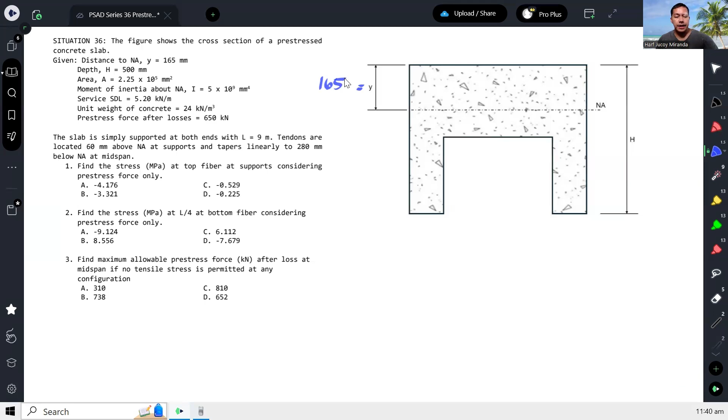In this particular problem, we have a problem from pre-stressed concrete. The figure shows the cross-section of a pre-stressed concrete slab. The distance to neutral axis, y, is equal to 165 millimeters. The depth or overall depth is 500 millimeters. The area is given, moment of inertia is given, service, superimposed dead load given, and then we are also given the unit weight of concrete.

So once again, yung SDL, ibig sabihin superimposed dead load. Kapag sinabing superimpose, it means that ito yung ipinatong lang doon sa structural element natin. So ibig sabihin, hindi pa kasali sa dead load na to yung self-weight ng mismong structural element. Later on, we will add that because binigay naman yung unit weight ng concrete.

Okay, and we are given the pre-stressing force after losses of 650 kilonewtons. The slab is simply supported at both ends with length equal to 9 meters. Tendons are located 60 millimeters above the neutral axis at supports and tapers linearly to 280 millimeters below the neutral axis at the midspan. So this is a type of pre-stress concrete problem wherein the eccentricity of our tendons is not constant.

So i-drawing natin. Yung cross section niya, I mean yung elevation view niya. So let's say ito yung slab on the elevation view. Kasi sinabi naman simply supported. So parang sinasabi niya that if this is the neutral axis.

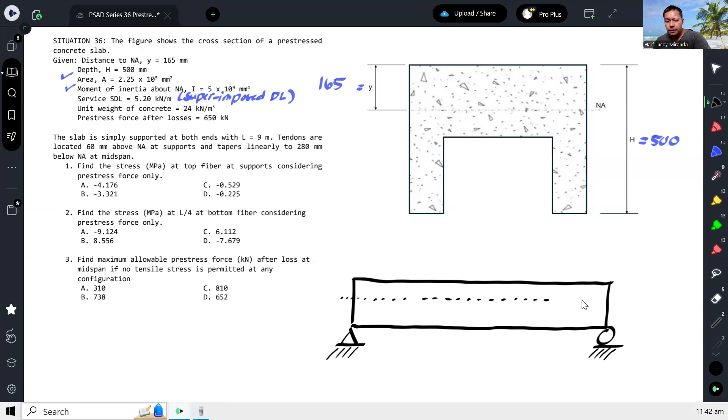Sabi niya, dun sa support, it is the tendon is located 60 millimeters above the neutral axis. So nandito. And dun sa midspan, it is now below by 280 millimeters. So let's say nandito naman. So kunwari yan yung midspan. So ibig sabihin yung tendons natin, ganito ang itsura.

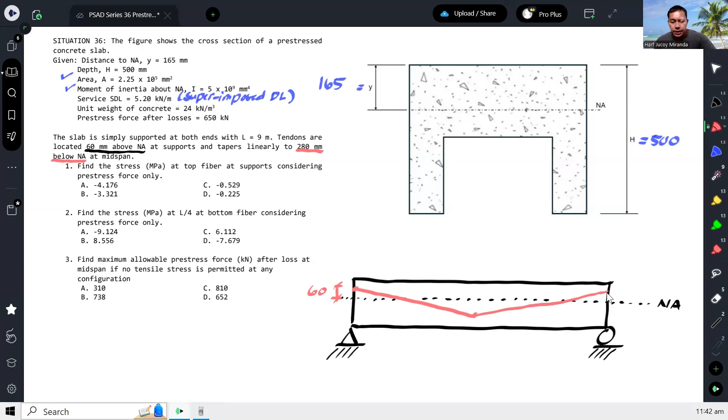So this is at 280 millimeters. So this is at the midspan. So in short, yung mga sukat, lagyan natin. This would be the full span, 9 meters. So yung kalahati is 4.5.

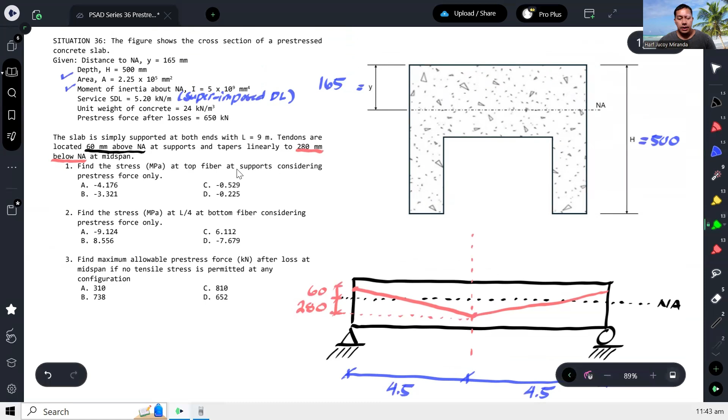Alright? Okay, so now, what are the questions? Find the stress at the top fiber at the support considering pre-stress force only. So ano daw yung stress sa top fiber at the support? Top fiber tapos sa support.

Okay, ibig sabihin, dito tayo mag-a-analyze. Pwede dito, kahit saan dyan. Okay, let's say kunin natin yung section na to. So yun yung section at the support.

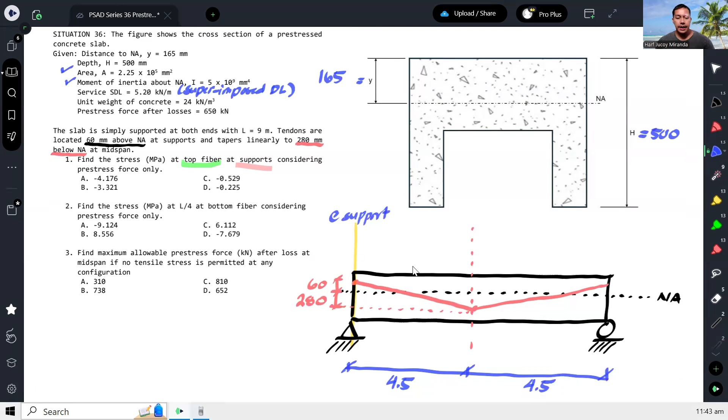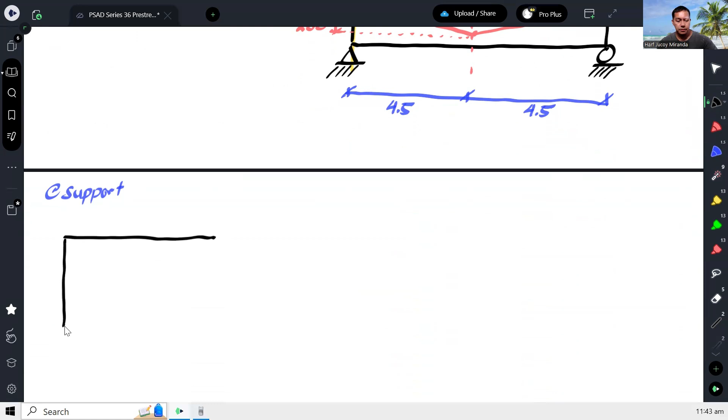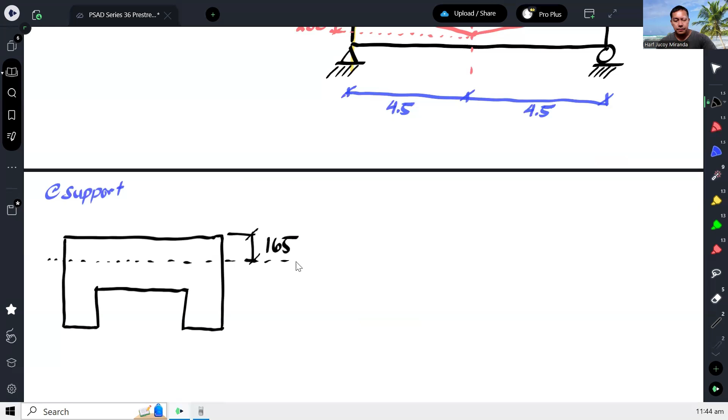Alright, so drawing natin. So the cross section will look like this at the support. Tapos kunwari ito yung neutral axis. So from the top, sinabi naman na this is 165. And then overall depth is 500. So ibig sabihin 500 minus 165, that's 335. So 335 naman yung distance sa bottom.

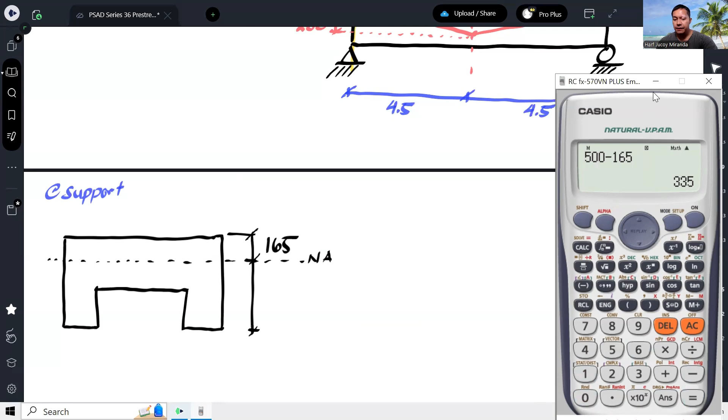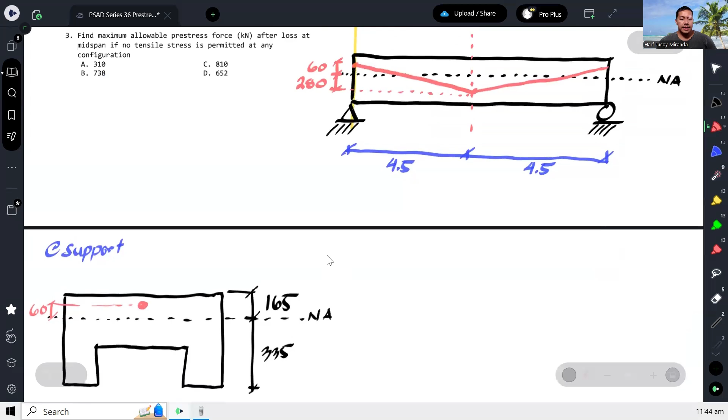Okay, tapos at the support, yung tendon nandito. Nasa 60 mm above the neutral axis. So nandito yung tendon, 60 mm. Okay, so ang tinatanong lang sa atin sa number 1 is ano yung stress dun sa top.

So dito, ano yung stress dyan? Due to pre-stress force only. So wag muna natin isasali yung load na binigay. Kasi sinabi niya naman na pre-stress force only. So let's see, alam natin na kapag tumingin tayo sa side, ganito yung mangyayari. Kunwari yung near support na cross-section.

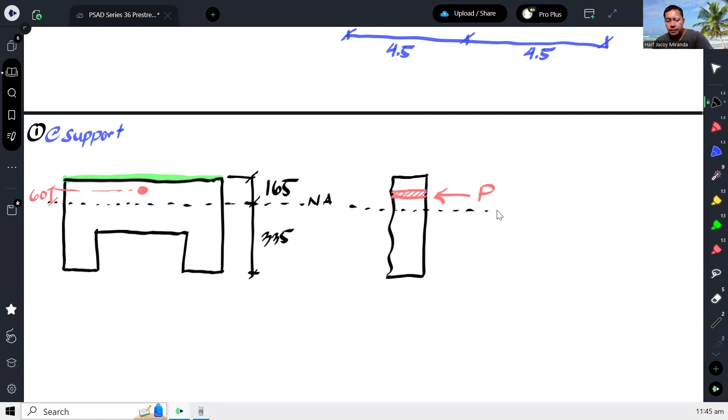So nandito yung tendon. Dyan sa tendon, magkakaroon ka ng pre-stressing force. Tawag dyan pre-stressing force, P. Okay, tapos ito yung neutral axis natin. Alright, so ngayon, dahil dyan sa pre-stressing force na yan, it will produce a compressive force or compressive stress at the top fiber.

At the same time, that particular force will create a bending moment in this direction. Kasi yung eccentricity mo nasa itaas eh. So pagka in-apply mo yan doon sa taas, ang ikot niya would be counterclockwise in this particular section of consideration. So ibig sabihin, yung moment na yan will be equal to P times yung eccentricity natin, in this case na 60.

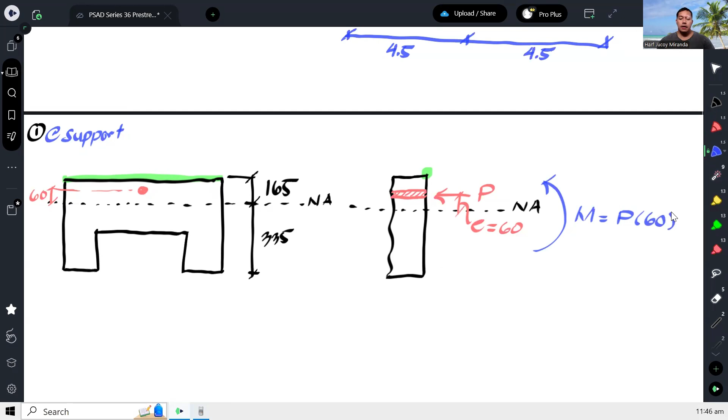So that means that the stress at the top, so top at the support, would be equal to - again, assume negative yung compression, positive yung tension. So yung pre-stressing force that will have a negative effect, P divided by yung area ng cross-section, and itong moment na to at the top, it will also have a negative effect. Negative MC over I.

Okay, and to expound on this, yung P natin is already known to be 650. Gawin lang natin na Newton para maging megapascal yung sagot. Tapos yung area naman ay binigay na 2.25 times 10 to the 5.

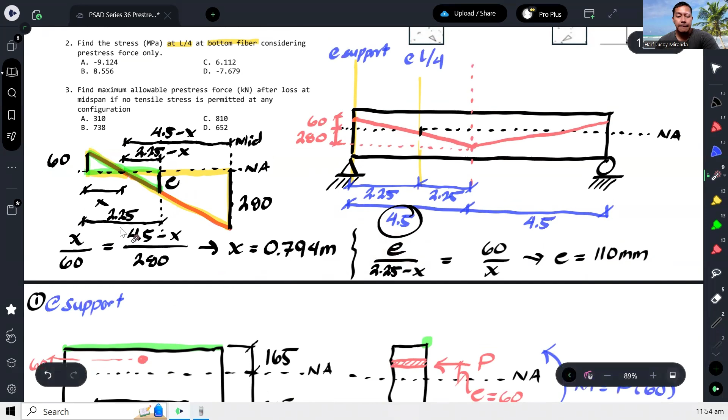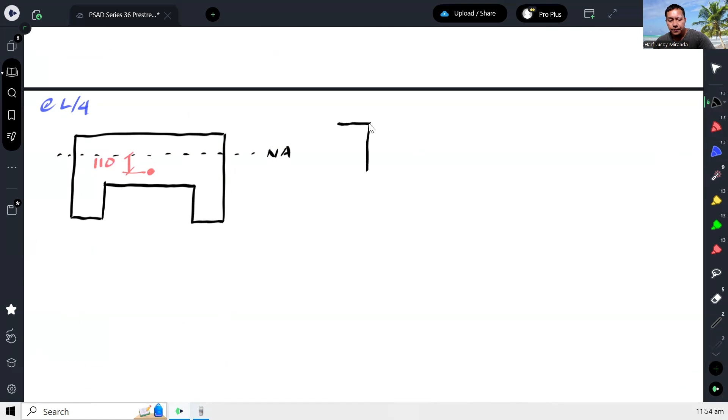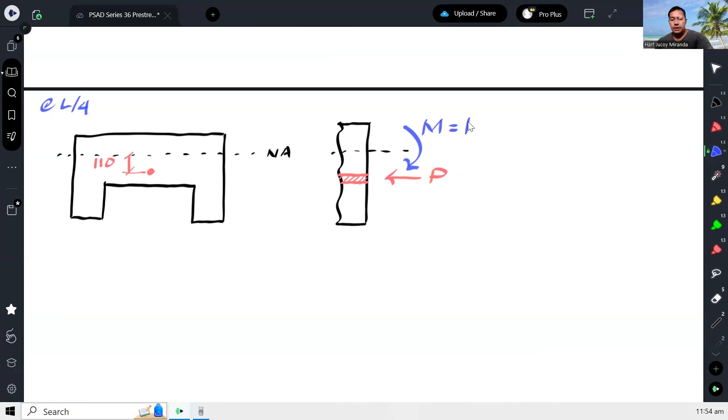Nandiyan na yan, no? So ang sukat nito is 110. So once again, kapag dinrawing natin yung cross-section sa side view, ayan, okay, so ito nandito na. Ito yung neutral axis natin. So ito ay nandito na, yung tendon. So again, yung tendon na will have a compressive force P. And according to our diagram, it seems that this P will produce a bending moment in the clockwise direction, so P times yung 110.

Okay, ayan, no? So ngayon, tinatanong tayo sa number 2, ano daw yung stress sa bottom fiber? So sa bottom fiber, meaning dito naman tayo mag-focus, dito, bali dito. Okay? So ano naman yung stress dyan?

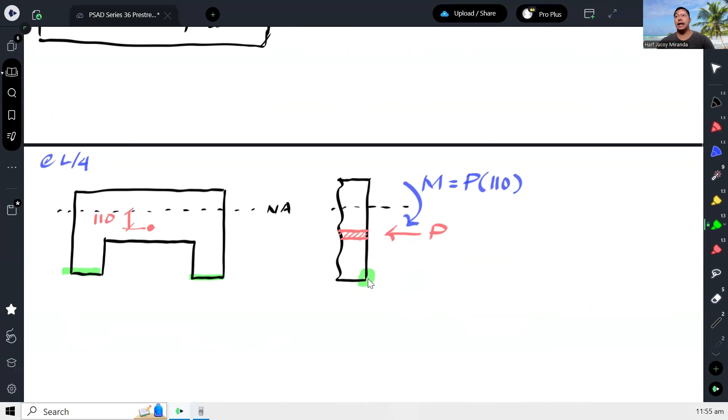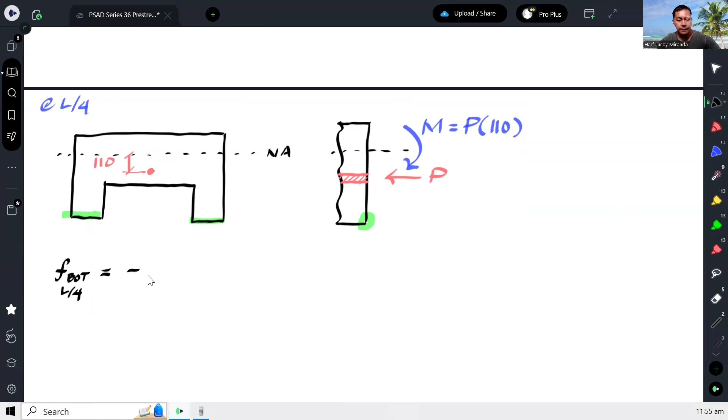Okay, so to calculate, once again, due to pre-stress force only ha, hindi kasali yung loads. So therefore, we have F at the bottom at L over 4 is equal to, compression is negative, negative 650,000 over yung area na 2.25 times 10 to the fifth.

And then, as you can see, yung effect nitong moment dito sa ilalim is also compressive, no? So that will be 650,000 times eccentricity na 110 times. So take note na yung C natin dito is yung layo niyang fiber natin mula sa neutral axis. At di ba kanina, ito yung 335, kasi ito yung 165. Okay, so this should be 335 over moment of inertia, which is 5 times 10 to the 9.

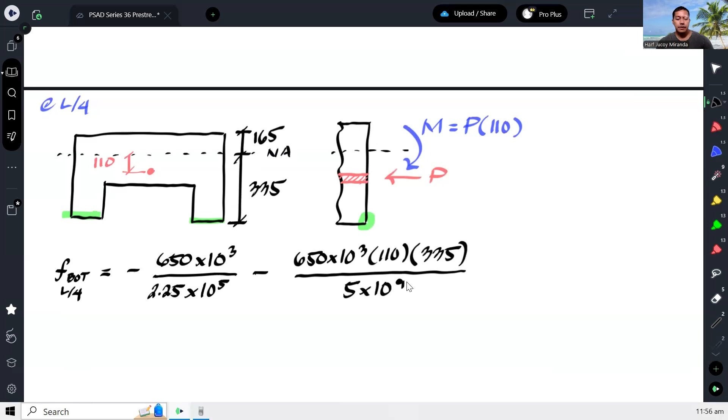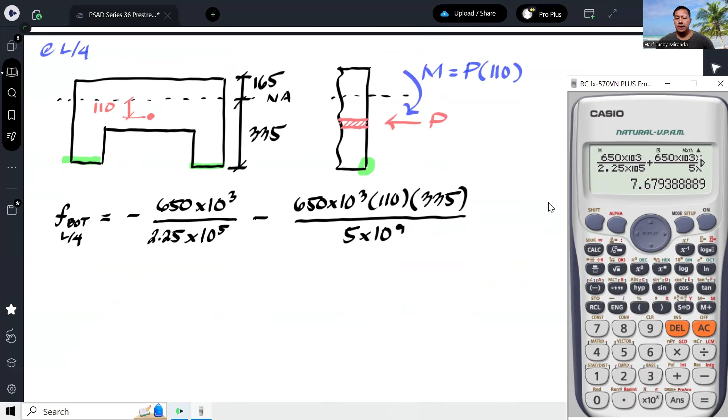Ayan, 5 times 10 to the 9. So therefore, we have, hindi ko lalagay negative, total negative naman lahat yan. So ito, samahin na lang natin, 650. So that gives us 7.67 na negative, no? Okay, once again, the negative sign indicates that this is under compression.

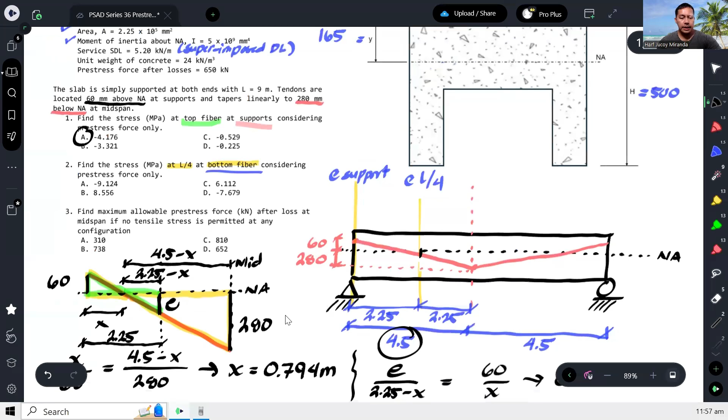Okay, so for number 2, our answer would be letter D. Okay, and then lastly, find the maximum allowable pre-stress force after loss at the midspan if no tensile stress is permitted at any configuration. So doon naman tayo sa midspan mag-a-analyze dito.

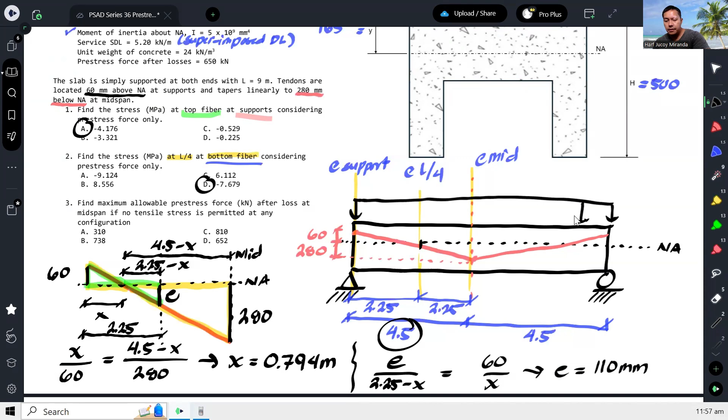And in this case, isasama na natin yung load, no? Isasama na natin in-apply na load. So may load tayo dito. Okay, so yung load na yan is dapat unfactored no kapag nag-a-analyze tayo ng pre-stress no.

So we will have yung 5.2 plus yung self-weight. So ang self-weight ay calculated as gamma, yung unit weight na to, multiplied by the area of the cross-section para maging kilonewton per meter. So tingnan nyo na lang no, yung kilonewton per meter cube. Para maging kilonewton per meter, kailangan mo mag-multiply ng meter squared, which is area, itong area na to.

Okay, so that would give me 24 times 2.25 times 10 to the fifth. Pero naka-millimeter squared kasi yan eh, gusto natin meter squared, so magdi-divide tayo ng 1,000 squared. Okay, and kapag kinompute natin yan, that will give us 5.2 plus 24 times 2.25 times 10 to the fifth over 1,000 squared. So that gives us 10.6.

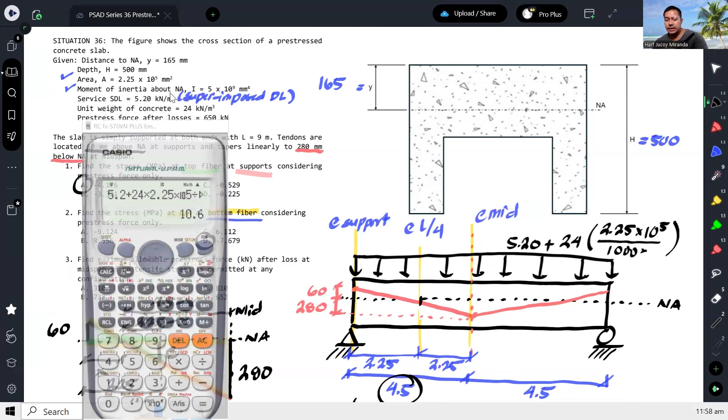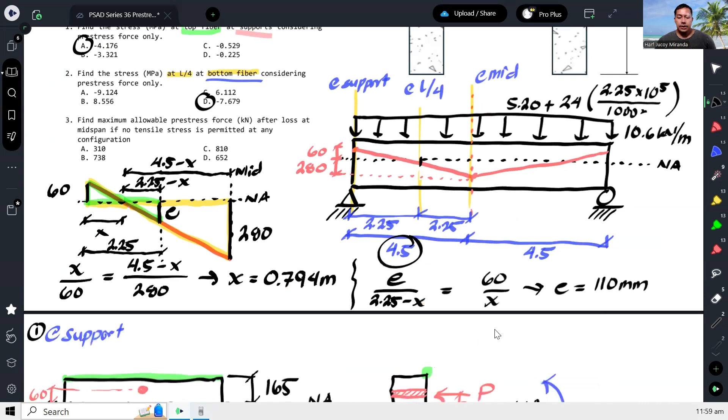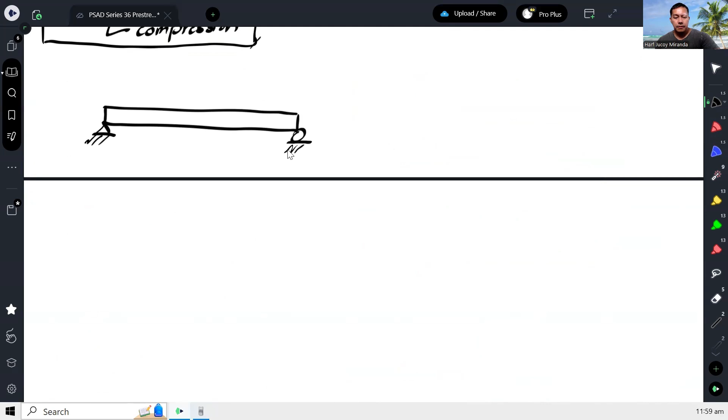Okay, so meron tayo ngayong load na total load na 10.6 kilonewton per meter acting on the slab. Alright, so now dahil sa midspan na tayo mag-a-analyze, bali ito ngayon yung beam natin or yung slab. Okay, so di ba kung meron kang load, alam natin na kapag kinat natin yan dito, okay, meron niyang mapoproduce na bending moment dahil sa load na to.

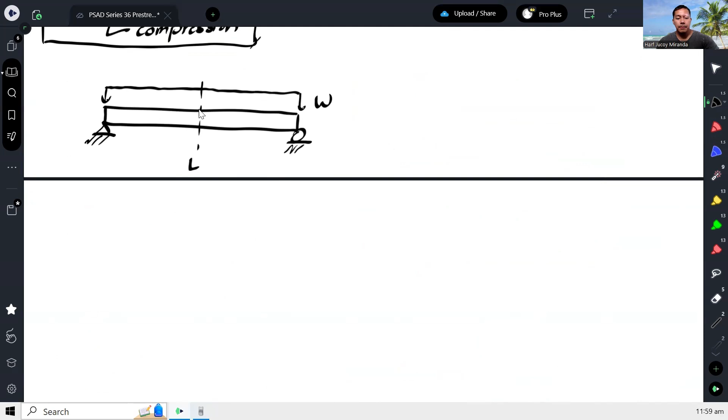W. Kung meron itong span na L, yung moment dito na mapoproduce will be... ang bending kasi niyan ganito eh, so positive in nature yung bending niya. Okay, so ibig sabihin yung moment mo pag ganito. Okay? Alam din natin na yung moment na yon due to the loads, tawag ko na ML, is equal to W L squared over 8 kapag simply supported with a uniformly distributed load throughout the span.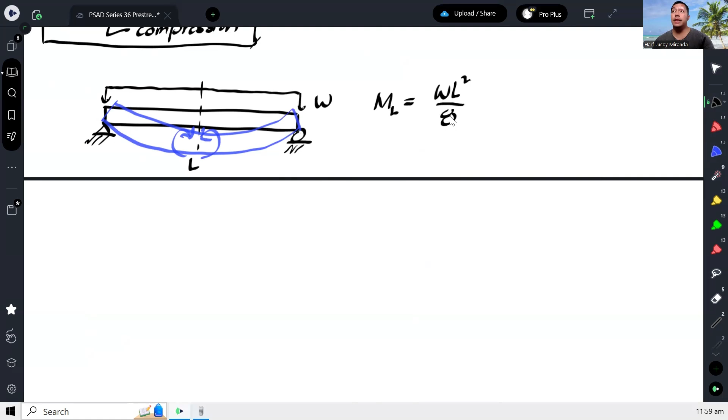So therefore, we can directly calculate here 10.6 times span squared over 8. And yung maximum moment na yon at the mid-span due to the load would be 107.325 kilonewton meter. So ito ngayon yung moment. Pero itong moment na to positive in nature, no? Ibig sabihin ang ipoproduce niya na bending is positive bending.

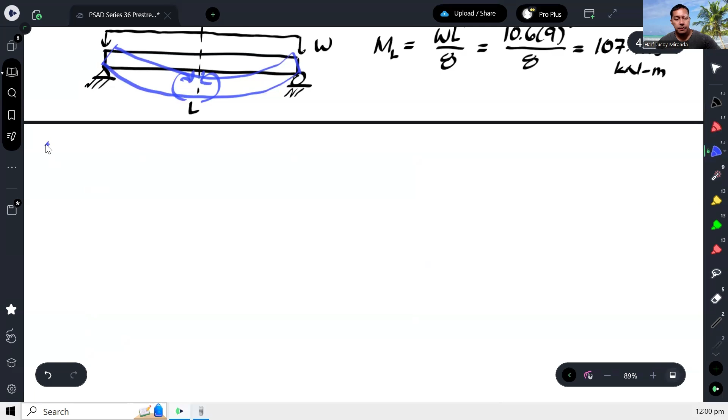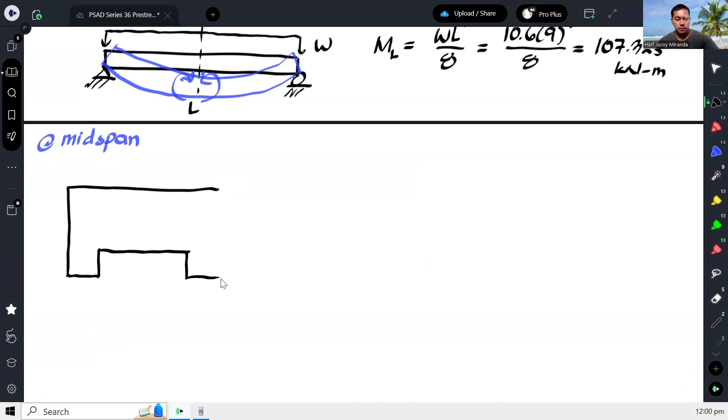So ganitong itsura. Ngayon kung titingin tayo sa support, I mean at the midspan. Okay, kung titingnan natin yung cross section sa midspan, ganito ang itsura. Ganyan, no? So ito yung neutral axis. Ito ay 165. Ito ay 335. Tapos yung tendons natin is located 280 at the bottom.

Okay? So ngayon, kung titignan ulit natin yung cross-section view niyan or yung side view niyan, ito yung neutral axis. So yung tendons natin nandito. So yung tendons na yan, meron ulit compressive force P. So based on the configuration, ang moment na ipoproduce niyan is ito. Okay? So yung moment na ipoproduce niya is negative in nature.

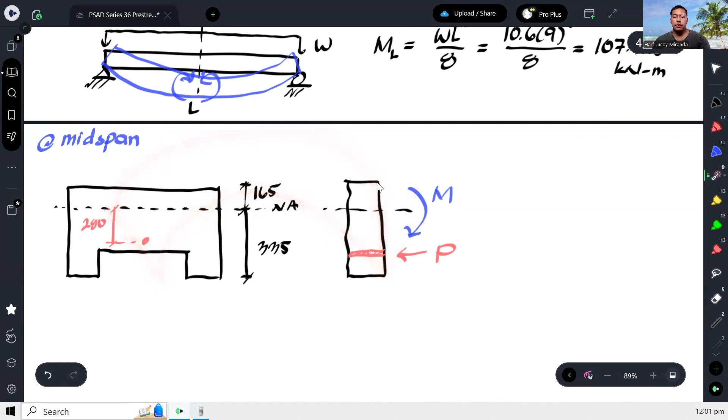No? Bakit negative? Kasi ang nangyayari, tinutulak nito yung baba niya. So ibig sabihin, pag tinulak mo yung baba niyan, yung beam natin is gaganto, gaganyan. Okay? Kaya di ba yung ganitong klaseng bending, negative in nature. Alright? So kaya ganito. So ngayon, ibig sabihin, yung moment naman na to, na positive in nature, kapag tinranslate mo dito, ang itsura niya is pa ganito. Okay? Kasi ang ginagawa naman nung moment na yun, na galing sa load, is binibend niya yung slab in this direction.

Okay, so yan yung nangyayari. So yan lahat ng mga loads natin on that particular mid-span support, at the mid-span. So ang tinatanong sa atin is, ano daw yung maximum pre-stress force P?

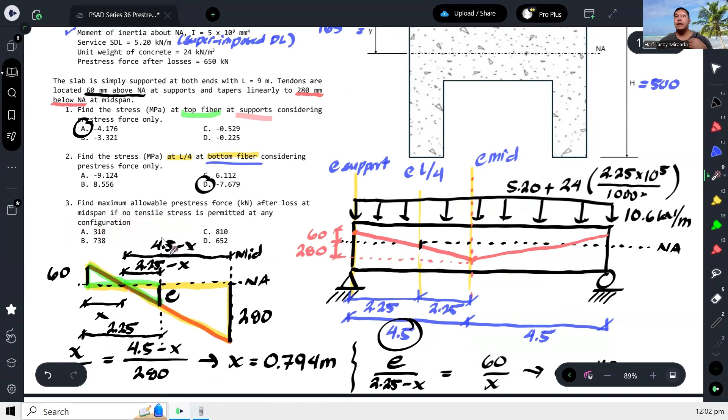Pinapa-recalculate itong P para walang tensile force at any configuration. Hindi niya sinabing at the bottom, ha? Sinabi niya at any configuration. So kahit saan, okay? Kung pag-iisipan mo, dapat walang maging tension mula top hanggang bottom. Ganun yung gusto niya mangyari.

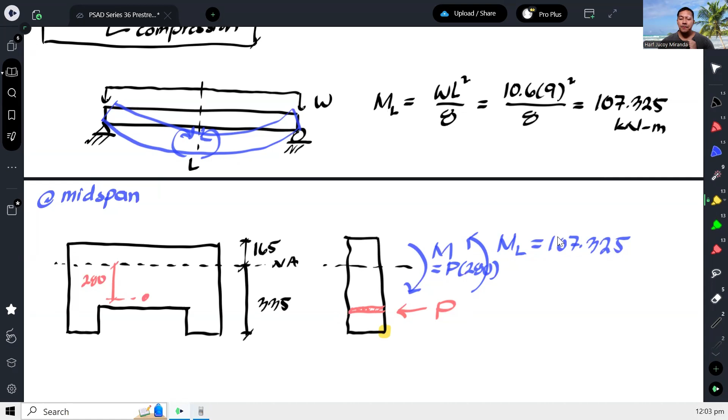Okay, ito, fix na to na 107.325. Tapos itong M na to will be equal to P times eccentricity na 280. Kasi itong P na to, kumbaga, i-resolve natin. So ngayon, kung mag-focus tayo sa bottom, madalas kasi sa bottom nagfo-focus no? Computin natin yung stress sa bottom.

So ang stress sa bottom at the midspan, okay, ay equal sa yung pre-stressing force, compression yon. Yung moment due to the pre-stressing force will also have a compressive effect at the bottom. Lagay ko na P times 280.

Tapos yung C natin sa bottom ay ito, 335 over I. Lagay ko na muna I. Okay, and then ito namang moment due to the loads, no? Moment due to the loads. Ang C niyan is also 335 kasi ang tinutukoy natin is bottom over moment of inertia. Ang effect niya naman sa bottom ay tension.

So dapat daw kumbaga, solve natin itong P na to in such a way na sisiguraduhin natin na walang tensile stress dun sa, in this case, dun sa bottom.

So dapat ito ay actually ano ang ginagawa ng iba, dapat in-equate sa zero, pero medyo misleading kasi yung ganyan. So ganito na lang, 'di ba ang gusto lang naman natin siguraduhin itong buong computation na to ay hindi mag-positive. Huwag magpa-positive kasi ang positive ibig sabihin tension. So para hindi yan mag-positive, dapat itong buong to ay mas mababa or equal sa zero. Okay, so yun yung tama na analysis.

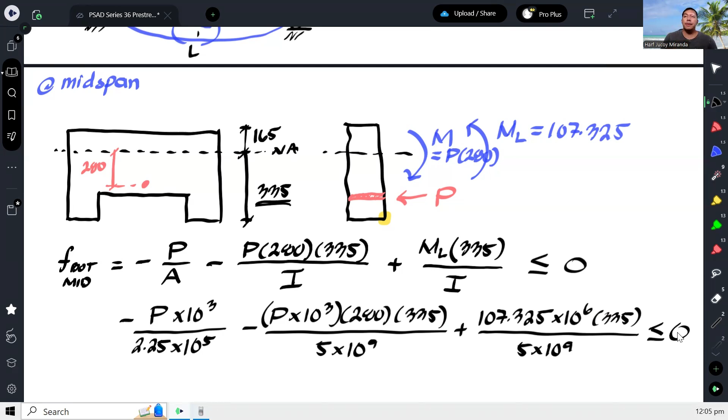And then plus, ito ay may value naman. Pero ito kailangan naka-Newton millimeter, so multiply ko ng 1 million. And this should not exceed 0 to maintain it being compressive.

Okay, and now if you solve for P, bali kung mapapansin nyo, you can factor out yung P dito. We can factor out yung P. Tapos you can transpose this on the other side. Okay, so magiging negative ito, no? Parang ganito yan.

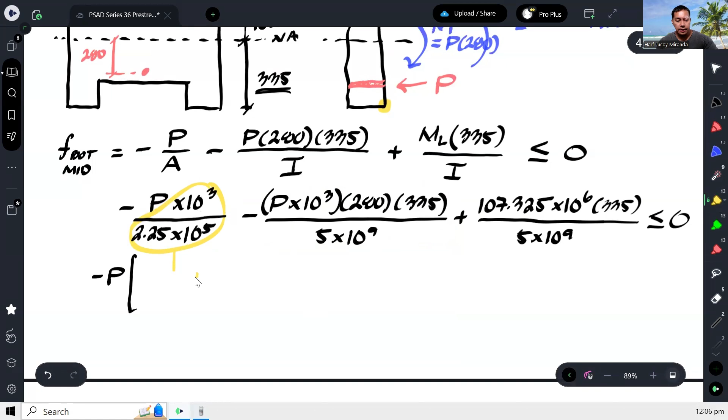So negative P, tapos itong buong to, lagyan ko na lang ng highlight ha. Itong buong to, yung mga yan, ha? Yan yung may iwan dito sa loob. Okay, or ganito na lang. Ito, dito yan, tapos minus, ito naman. Dito yan, ha?

Okay, so finactor out ko yung, sorry, plus na pala to kasi finactor out ko yung negative. Less than or equal, ito naman magiging negative. Negative na itong buong to. Nilipat natin sa kabilang side, tinranspose ko. Okay, tapos para ma-compute natin yung P, hindi ba di-divide natin ito?

Di-divide natin itong buong to dito. Okay, tapos isasama natin yung negative, di-divide natin to. So bali, magiging positive na tong right side. Pero di ba merong rule ang inequality na kapag ka nag-divide or nag-multiply ka ng negative side, kailangan mo itong baliktarin. Okay, so ibig sabihin, yung P natin will be, magbabaliktad na, should be greater than or equal to the value here. And that value is just, kapag sinolve mo to, as an equation.

No? Kapag sinolve mo yun as an equation. So bali, ganito na lang. So negative x 2.25 to the fifth, minus yung P times 1,000 times 280 times 335 over 5 times 10 to the 9, plus 107.325 million

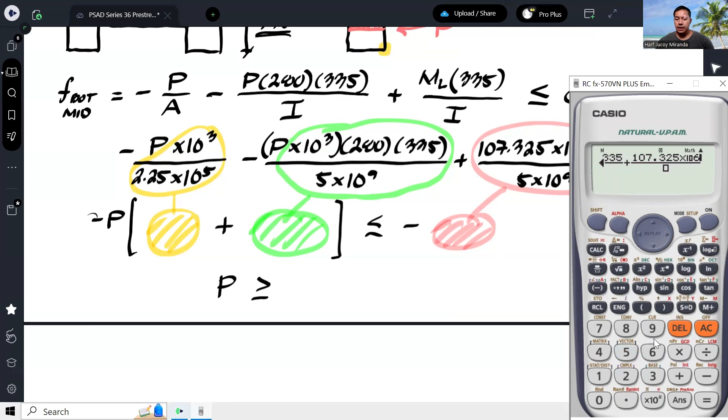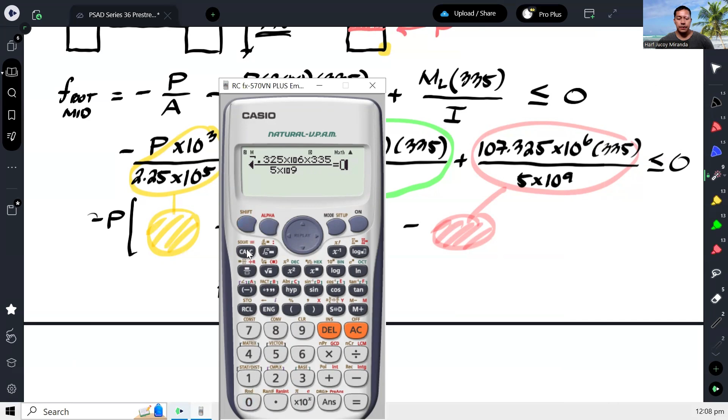times 335 over I. Okay, again, if you solve that as an equation, so if you solve that, ang x natin is 309.887.

Okay, ito ngayon yung disadvantage kapag sinolve mo lang siya as an equation. You wouldn't understand, no? Ano ba itong 309.887? Yan ba yung maximum na pwedeng P o yan yung minimum na kailangan na P para walang tensile force or tensile stress? Well, based on our inequality, it is telling us that our P should be at least 309.887 kilonewton to ensure na walang tensile stress sa bottom.

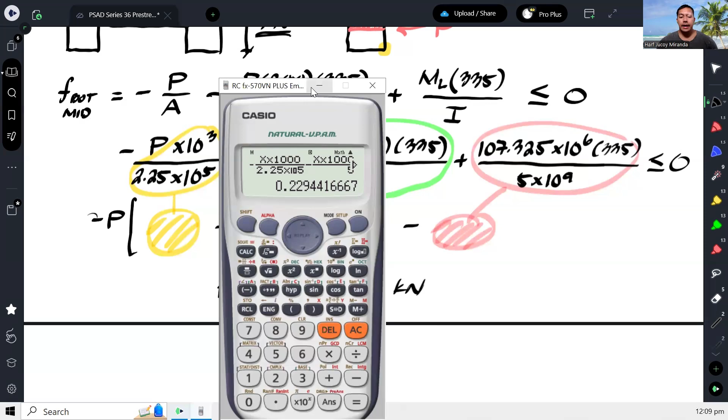Okay, so ibig sabihin, kapag mas mababa dyan, magkakaroon dito ng tensile stress. Kunwari, no, ito, calc natin, calc. Syempre kapag yan, 0, no? Kapag nilakihan natin, 310, negative. So ibig sabihin, compressive. Pero pag niliitan natin, sabihin natin na 300 na lang, nagkakaroon ng positive stress. So ibig sabihin, hindi po pwede bumaba ng 309.887 yung force P kasi magkakaroon na tayo ng tension dun sa bottom.

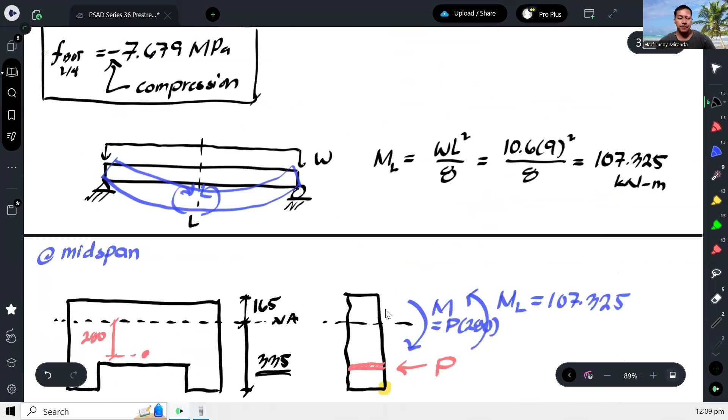Okay, and yan na ba yung sagot? Yan na ba yung sagot? Actually, meron ditong 310, well, not yet. We also have to counter-check kasi itong chinek lang natin sa bottom eh, bottom sa mid-span eh. Eh, paano naman yung sa top? Baka kasi yung sa top, magkaroon din tayo ng issue dyan. O, tingnan natin, so check naman natin yung sa stress sa top, sa mid-span.

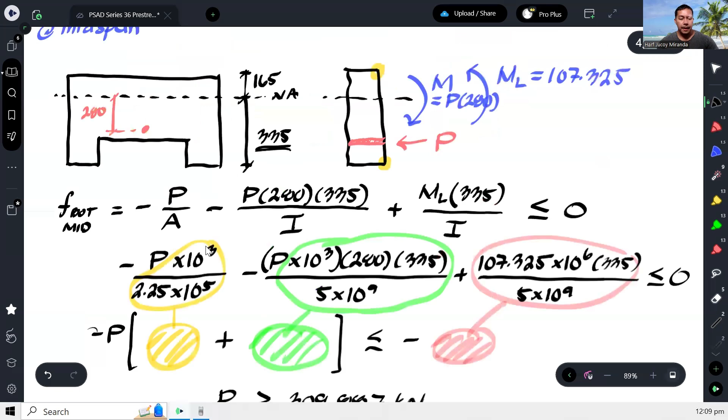So actually, halos ito lang din yung formula. Bali, negative P over A. Okay, tingnan natin isa-isa ha. Itong moment na to, magpo-produce ng tension dito sa top. Okay, so plus na yan.

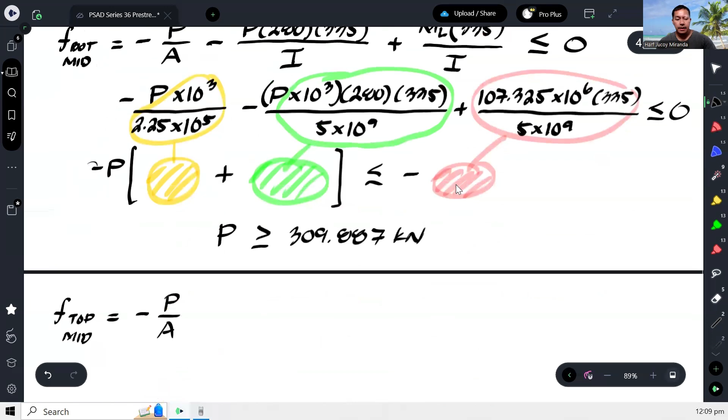Plus P times 280 times, okay take note, yung C natin sa top, ito na. Kasi nasa top na tayo, ito na. 165, no?

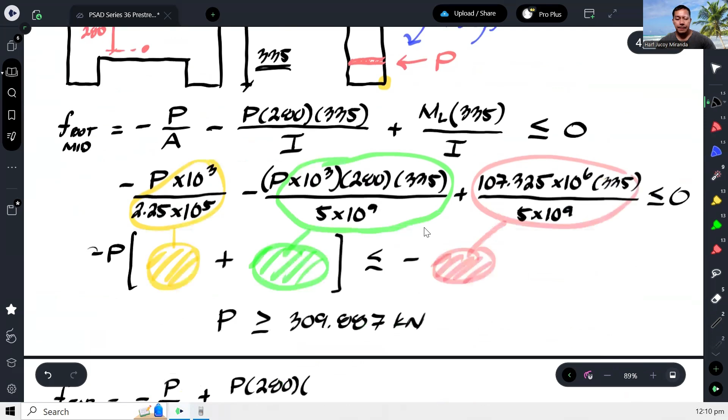165 over I. Okay, tapos yung moment naman due to the loads, kung titingnan natin yung effect nya sa top, compression naman. No? Compression. So negative. Moment due to the load times yung C is once again 165. Yun yung distance papunta sa top mula sa neutral axis.

So magiging ganito siya. At dapat hindi ulit ito lalagpas ng zero, kasi gusto natin ma-maintain na negative yan para compression lang siya. Pag lumagpas yan ng zero, magiging tension na siya and ayaw natin yun. Yun yung gusto ng problem.

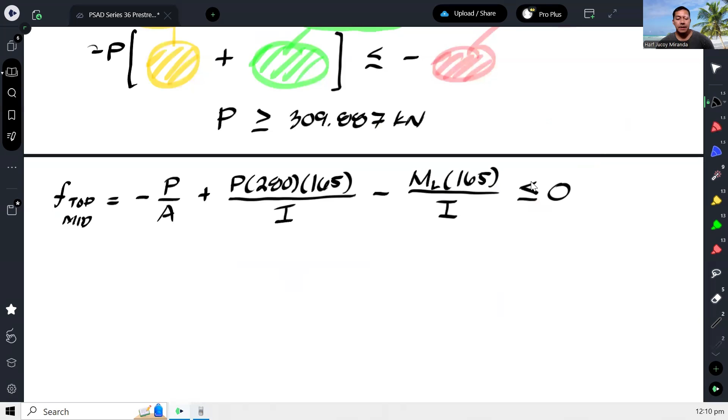So that means, kapag sinabshoot na natin ngayon, negative P, gawin ulit natin 1,000 over A plus P, gawin ulit natin times 1,000, 280 times 165 over I minus, this is 107.325 million times C over I.

Okay, and this should not exceed 0. So ngayon, analyze ulit natin paano ba ito mako-compute. So mako-compute ito pag ito, tinranspose natin sa kabila, no? Pag tinranspose natin sa kabila.

Tapos ito, pag factor out mo yung P. So factor out natin yung P dito. So bali, ito kasama yung negative, iwan ko sa loob, dito yan. Tapos ito naman, iwan ko lang dyan, dito yan, no? Tapos plus naman yun eh. So plus.

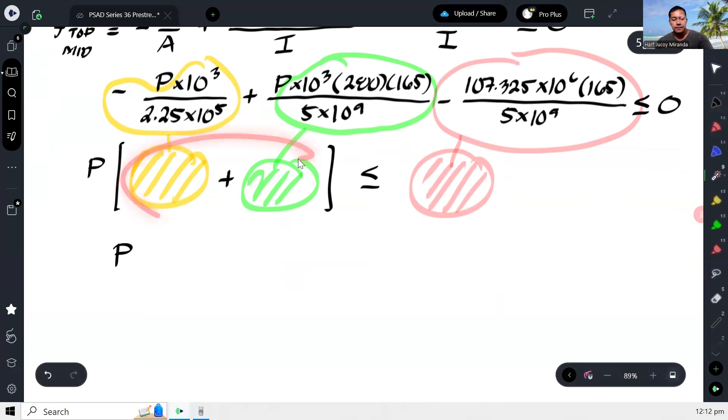Okay? And then ito, ta-transpose ko na sa kabila. So less than or equal pa rin yan. Pero pag tinranspose mo kasi ito sa kabila, kasama yung negative, magpa-positive na siya. Positive na siya. Okay? So ibig sabihin, dito, ang P natin, i-divide mo to, di ba? I-divide mo yan. Pero i-check muna natin kapag kinompute natin ito, kung positive ba or negative, para malaman natin kung

magbabaliktad ba yung inequality. So we have negative 1,000 over 2.25 times 10 to the 5th plus 1,000 times 280 times 165 over 5 times 10 to the 9. Kung titignan nyo, positive lang siya. So kapag dinivide ko yan sa kabila, this inequality will not change. Okay? So therefore, this would be what?

Isolve na lang ulit natin ng equation. So negative pa rin to. Ito ay plus na. Tapos ito ay 165 kasi we are now at the top. And then this is minus already. And then once again, this is 165. And then equate natin sa 0.

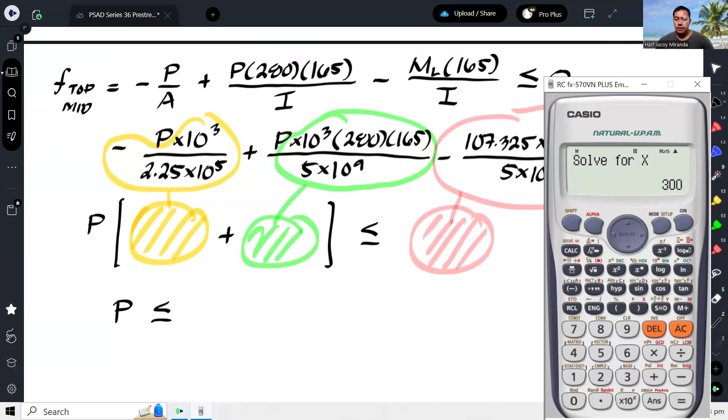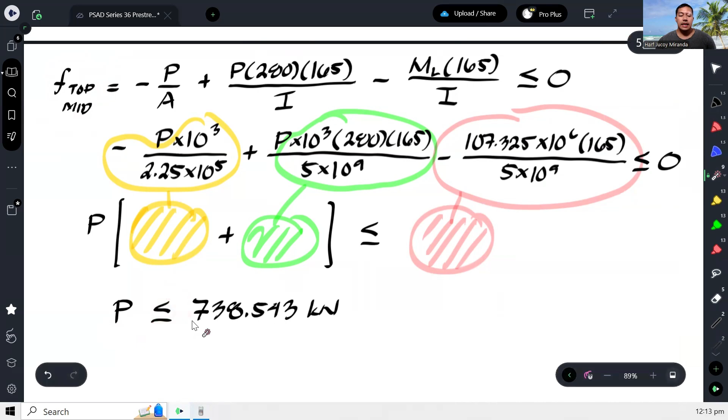Okay, and the value is 738.543 kilonewton. Okay, so ang sinasabi naman ito is para masigurado na walang tension sa top sa midspan, kailangan yung P natin ay hindi lalagpas ng 738.543. Bakit? Kasi pag lumagpas ka na dyan, kung titignan mo yung configuration dito, masyado na itong malakas. At kapag masyado nang malakas yung hatak niyan, magiging tension na to. Alright? So that means, ito naman yung magiging P sa criteria na yung top walang tension.

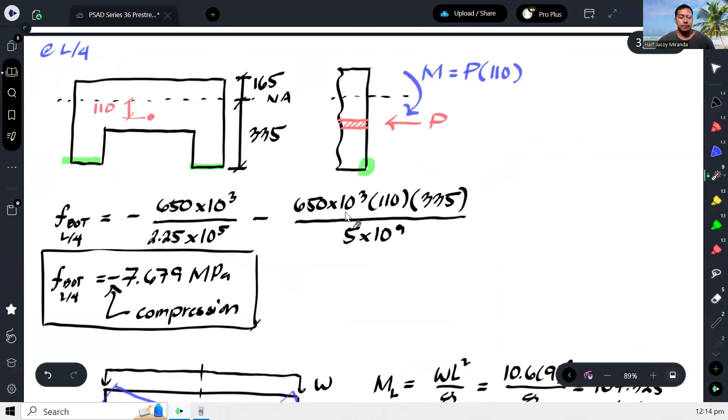So ang tanong ngayon, which of these will be our answer? So the maximum allowable pre-stress force after loss at the midspan if no tensile stress is permitted at any configuration. Ang gusto niya maximum, yung pinakamalaki.

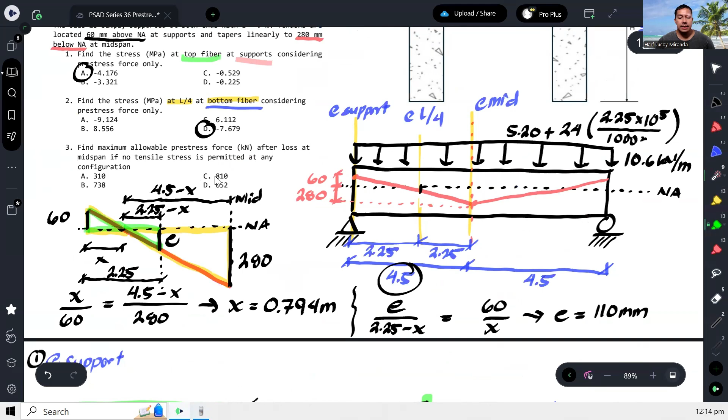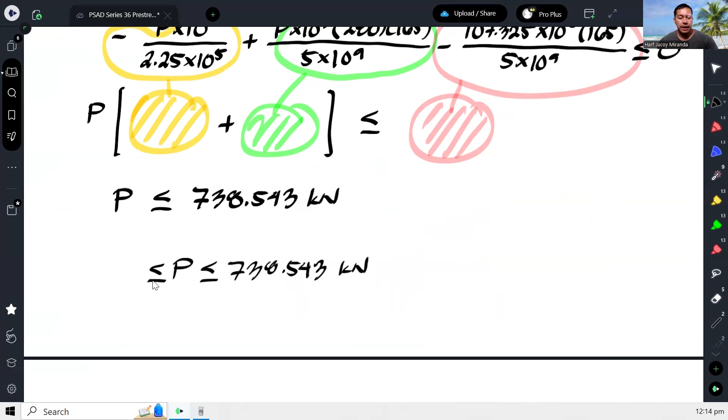So ngayon, kung i-consider natin yung sagot natin doon sa dalawa, kapag pinagsama yan, ito, tsaka ito, lumalabas, kailangan daw yung P natin ay hindi lalagpas sa 738.543 kilonewtons and hindi bababa sa 309.887. So ito yung range na pwede nating ilagay or igamitin as our pre-stressing force to ensure na walang tensile stress sa buong cross-section sa midspan.

So ibig sabihin, kapag bumaba tayo dito sa 309, magkakaroon na tayo ng stress. Di ba, pinakita ko na kanina, magkakaroon ka na ng positive na stress. So tension na yon. So dito naman, pag lumagpas tayo dyan, di ba ito, collect natin, sa top. And kapag ito, 0, no? Kapag binabaan mo, let's say 730, negative sa compression. Pero pag tinaasan mo, let's say 740, ayan, nagiging tension na, positive na.

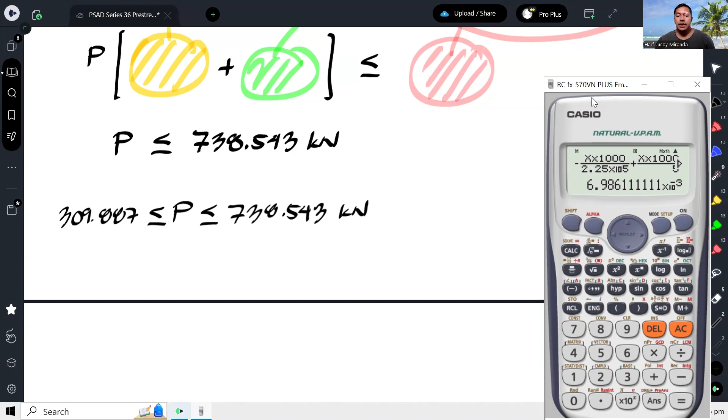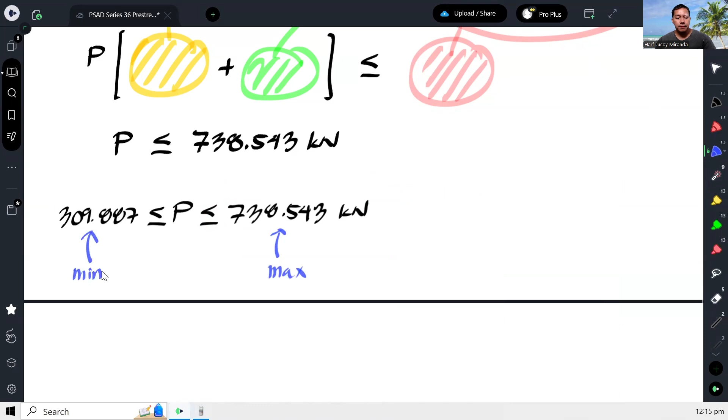So that's why, ito ngayon yung ceiling value ng P. Ito ngayon yung maximum. At ito naman, yung minimum. Okay, so in short, in this problem, our answer would be letter B.